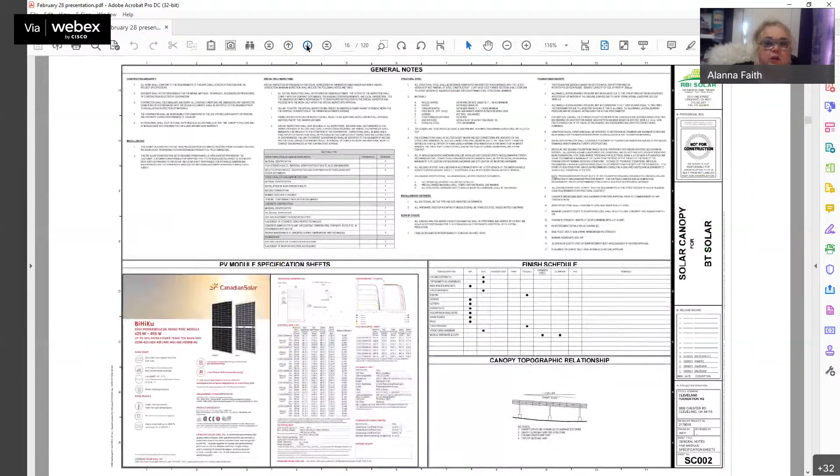And with that, to Ms. Brown for the oath. Good morning, I'm swearing in all who are present for this case. Do you swear or affirm that the testimony you're about to give is the whole truth and nothing but the truth? Please raise your hand.

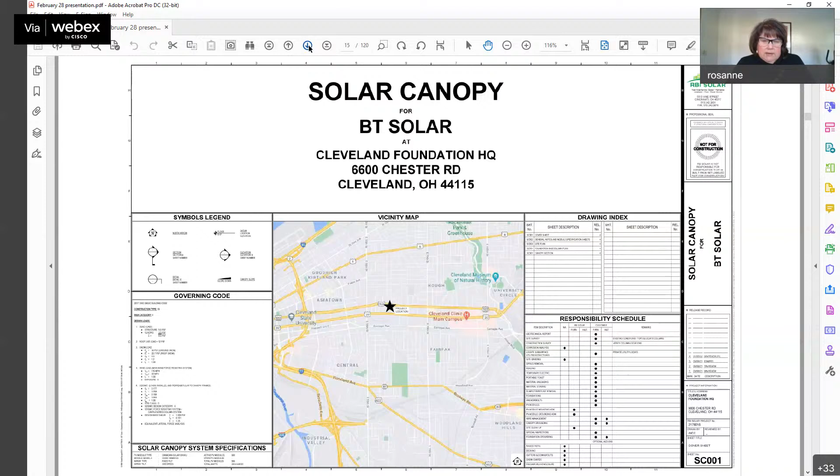The lot in question is designed to be an outdoor parking lot of 101 spaces that was previously presented to the committee and approved along with our headquarters design. The design shown here is a solar energy panel constructed as a canopy. It would sit in the middle of the parking lot.

It's very similar to the exact same type of solar canopy used at Rainbow UH Babies, just a couple of blocks down the street on Euclid in their parking facility. The energy produced from this will help achieve LEED Gold status for the Cleveland Foundation's building by using solar energy versus other types of energy.

So we're here today to try to understand what needs to be done in order to go forward with the construction of this canopy, which we thought was previously approved in the parking lot permit.

Okay, so you're handing it off to someone else now, right? Yeah, so I'll hand it over to Laura Reese, our Vocon architect at this moment.

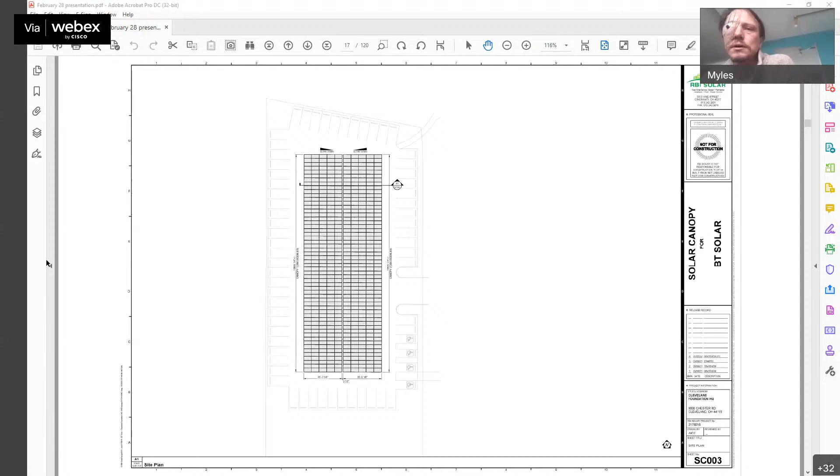Our perspective is that the use of this property has not changed. This was permitted as a parking lot and off-street parking accessory for the new construction happening across the street. This is auxiliary parking, employee parking, visitor parking for the facility.

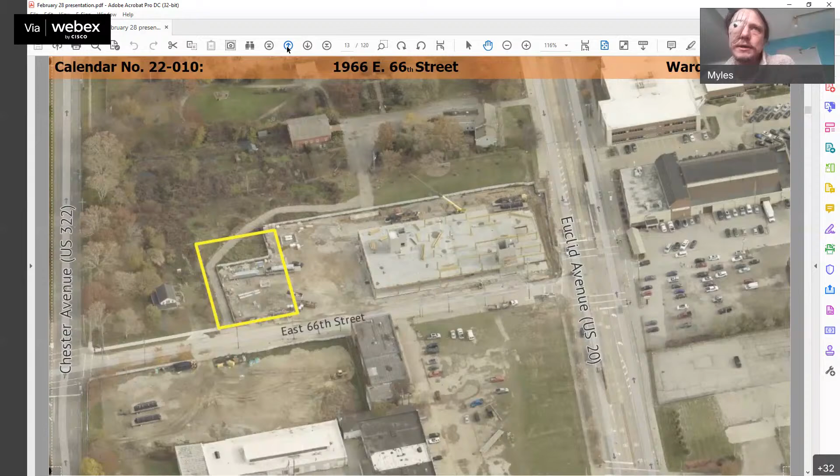The canopy that we're proposing is simply making use of land that otherwise would be sitting there as only parking, but trying to take that and turn it into electricity, renewable energy that can be used over at the Cleveland Foundation main headquarters.

This structure is similar to other projects that we've got around town, from the First Unitarian Church in Shaker Heights, to the aforementioned Rainbow Women's and Babies Center, to the historic renovation project over at the corner of West 25th and Detroit.

We received the notice of non-compliance and initiated this because we simply think that this use has already been permitted in the permit. The use has been established by previous permits as being an accessory off-street parking permit, and that this is simply an additional utility being provided on the site.

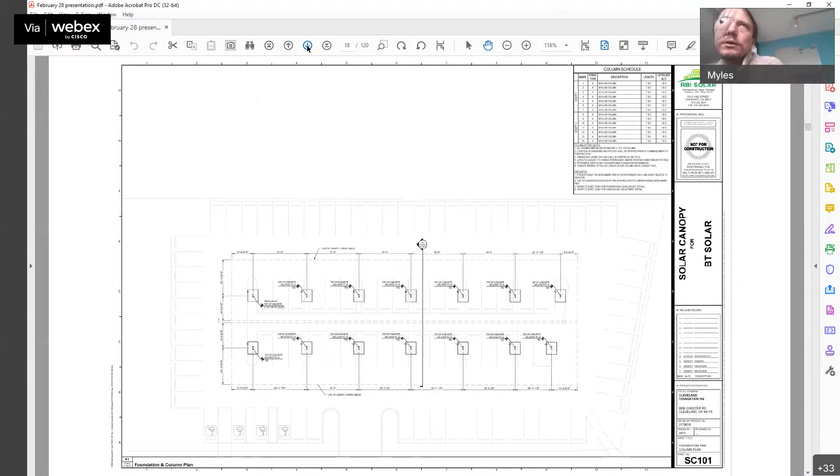Okay, we submitted those documents on, was it Monday, I believe? Are there any paper renderings right now, Maurice, that has it? I mean, if they don't have it, it's not necessary. This is what I have that was submitted with the application. Okay, I just don't have a video.

Okay, so on Monday we sent it to Elizabeth, because previously we had attempted to send it to Cassandra and it got kicked back. We didn't have the email listed in the notice for where to submit these to. So I can send that now, but it's my perspective that this use case was permitted, and this carport was even suggested and called out on previous plan sets.

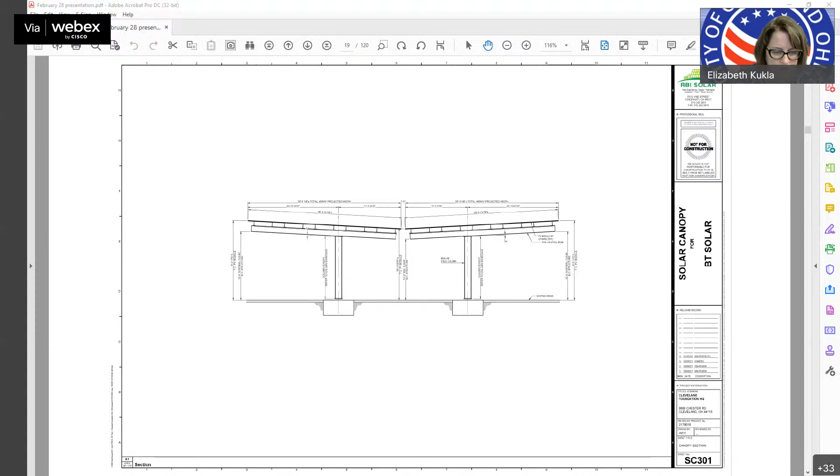I'll go ahead and check that email, Maurice. Could you tell me, through the chair, which person it would have been coming from? It would have been coming from me, Myles, and then the @ symbol BT, like Bravo Tango, dot solar, S-O-L-A-R. There is no dot com, just Myles with a Y at BT dot solar.

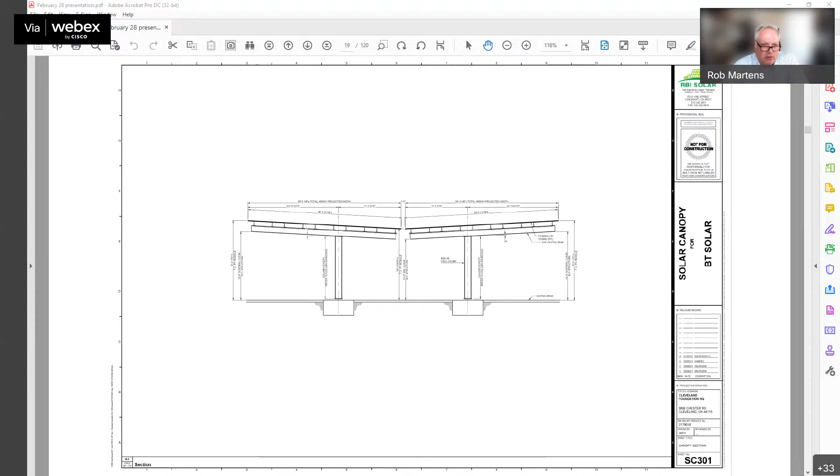No, I think Myles has covered it very effectively. The notice of violation was received in response to our filing a building permit for the solar canopy, and it was a surprise to us again, because we thought it was already a permissible use and zoning had been approved.

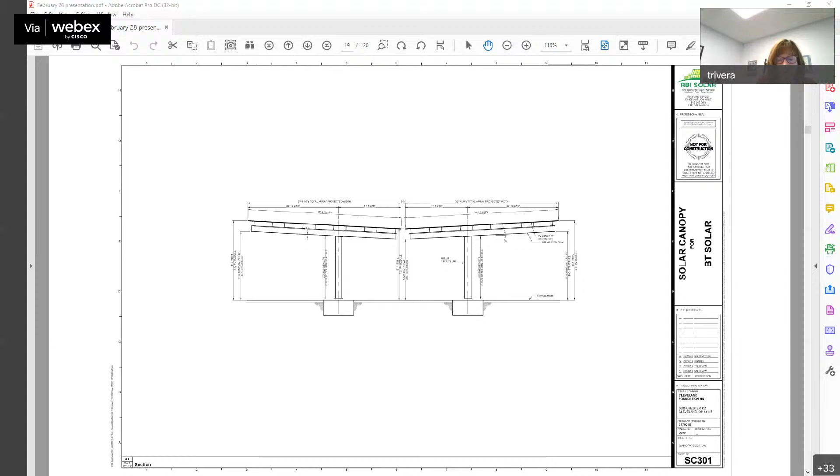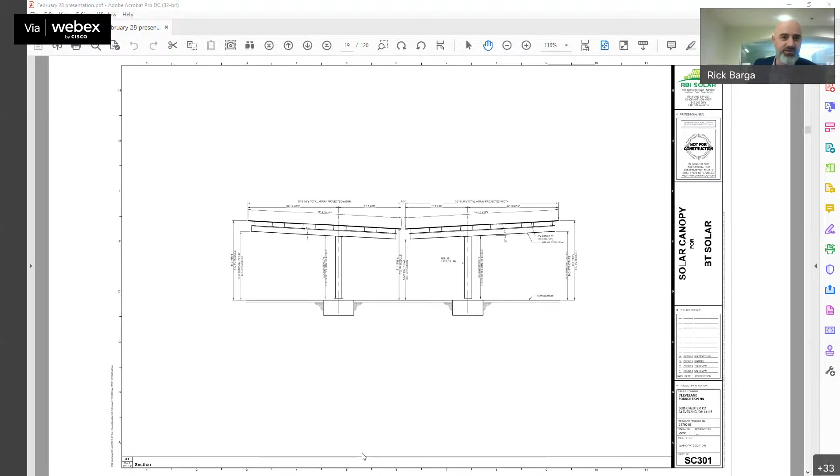Okay, thank you. Mr. Barga? Good morning. I also sent a letter of support from Midtown Cleveland. I'm the Vice President of Economic Development here at Midtown, expressing Midtown Cleveland's support for not only this variance, but also the Innovation District, the Cleveland Foundation's headquarter move, and everything we are trying to accomplish in the neighborhood. So if that hasn't been provided, I'm happy to send it again. It was sent on Friday.

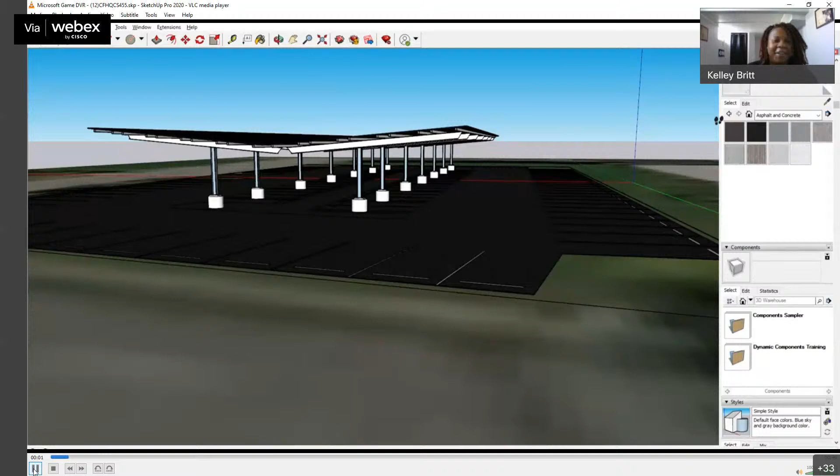All right, is this the rendering right here, Maurice? Yes, ma'am. And I might also point out we have Kim Scott here, the neighborhood planner. I have Kim on the list. I just wanted to get this over.

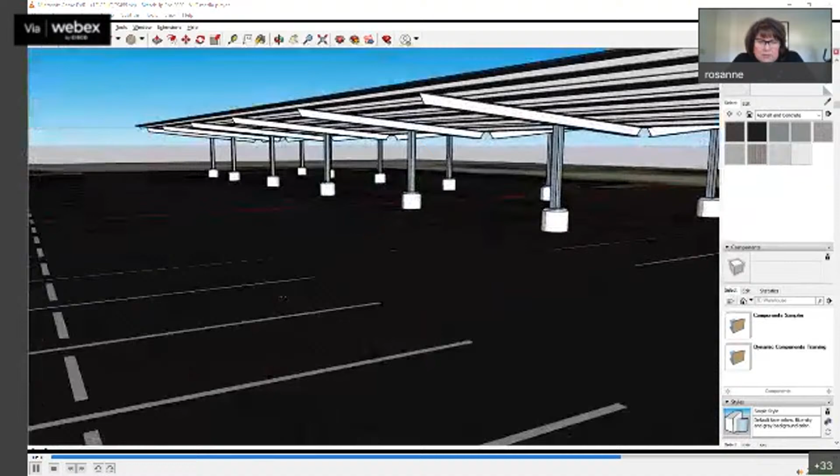There's parking spaces around the perimeter of it and underneath it. There'll be ample lighting, blue emergency lighting there as well. There'll be cameras. The parking lot, as previously requested, is not shown on this diagram, but it's surrounded by a decorative fence. That's only for the entire rendering, showing you the 3D dimensional aspect of what the canopy will look like.

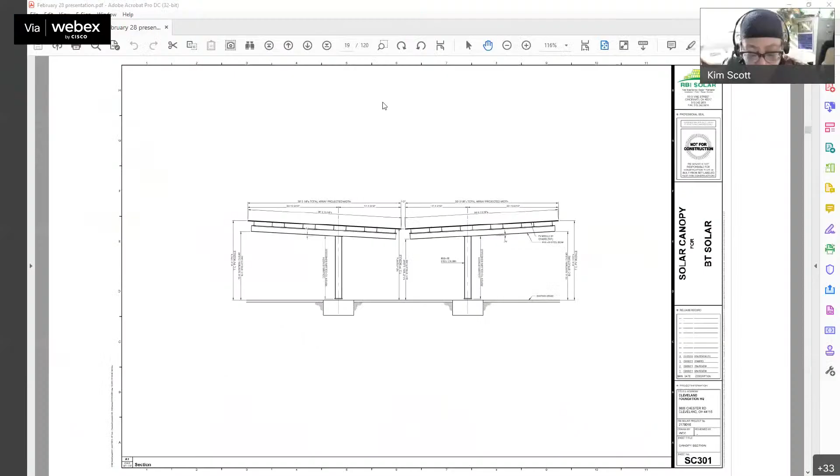I just want to remind the board the purpose of the Midtown Mixed Use Districts and why it was established. It was established over 15 years ago, and the regulations are established in order to permit and encourage an intensity and mix of development that supports and implements the development policies that have been established for this area by the City of Cleveland, Greater Cleveland Regional Transit Authority, and Midtown Cleveland, Inc. The intention in establishing this district in the development regulations is to permit specific uses at a development intensity and with an urban form in that manner.

To encourage a pedestrian-oriented mix of uses, including retail, residential, offices, and light industry, expands the available economic development options while strengthening the existing uses found in the Midtown District. It encourages a compact land development pattern that increases resident and employment densities to support RTA's Euclid Corridor Transportation Project investment and facilitates usage to and from the Midtown area.

To ensure that new development and or redevelopment will occur in a unified manner consistent with the Midtown Cleveland, Inc. strategic plan as adopted by the City of Cleveland Planning Commission. And finally, to establish design criteria for new development or redevelopment to ensure that an aesthetically pleasing and pedestrian-friendly environment is provided. That was established in 2005.

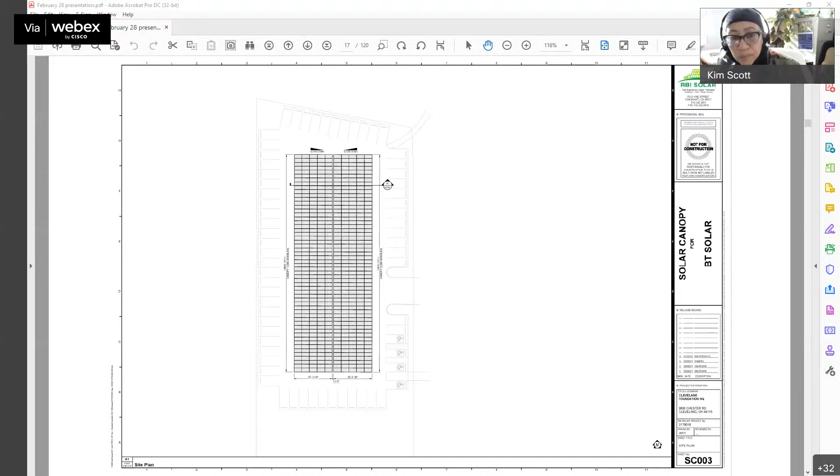Madam Chair, can I add something? The MMUD, the Midtown Mixed Use District, is a little bit of a unique district in our zoning code, in that if one use is not specifically listed, it's not permitted, and that's why we're here today. As Ms. Scott stated, we enthusiastically support this, which is why it was a surprise that it had already gone through Planning Commission and been approved. We were surprised to see it until we realized it was the MMUD district that kicked this out. So maybe it's time to look at that again for future reference.

Thank you, Maurice. I'll open it up to the board for questions or comments. Madam Chair, this is Ms. Faith. I just had a question. I believe Ms. Potter noted that this particular structure with the solar panels is part of the LEED certification. Is the LEED certification contingent on this? I just wanted to clarify that.

We most likely would not receive a gold status. We would probably drop down to silver if we did not have the solar capability to produce this type of electricity. Solar is a very powerful investment tool if you're trying to get LEED points and reach the highest levels. In order to get past basic LEED, you really need to start considering how you're going to implement renewable energy on site. The building footprint and the roof weren't enough for us to get the points we needed.

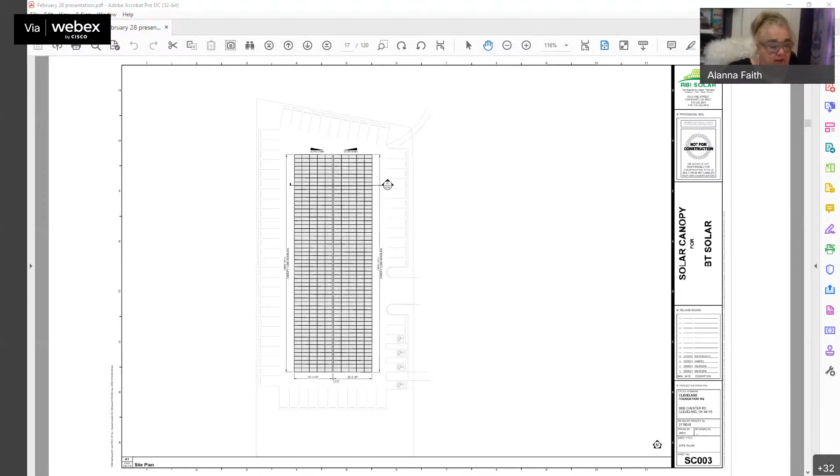With that, I will move that we go ahead, given testimony from two city planners from the Midtown CDC and the explanation we just had from the Cleveland Foundation and their agents. I move that we go ahead and approve this variance for calendar number 22-010.

Thank you. Can I have a second, please? Second, Ms. Barnes. Go ahead, call the roll. Ms. Kukla? Ms. Brown? Yes. Ms. Barnes? Yes. Ms. Faith? Yes. Ms. Britt? Yes. Calendar 22-010 is granted.

It'll be ratified next week, and we will send the appellant a letter. Thank you so much, we appreciate your support. All right, thank you, good luck. Bye-bye, looking forward to seeing this project come to completion. So are we. Yes, all right, thank you all. Thank you so much, everyone. Thank you, bye-bye.

Madam Chair, we move along to calendar number 22-013. This is at 1327 West 102nd Street. Rising Time Investment LLC, owner, proposes to establish use as a three-family residence in a B1 two-family residential district. The owner appeals for relief from the strict application of the Cleveland Codified Ordinances as stated in the agenda and the public record, of which there are four.

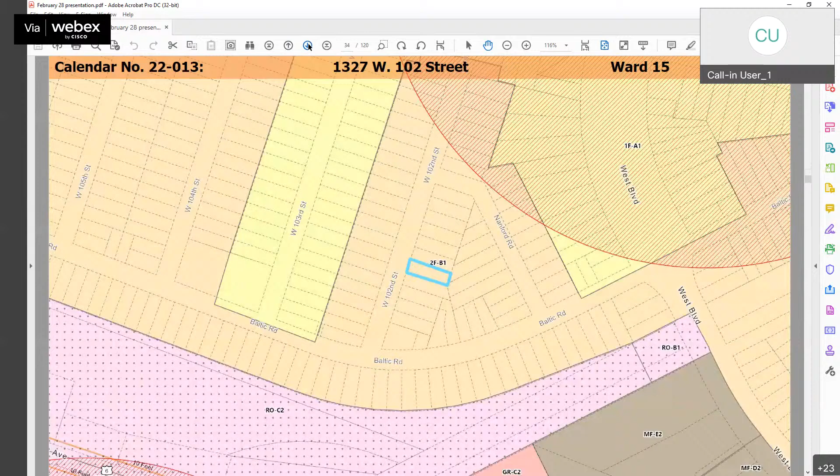All right, the property has been used as a three-family ever since God knows when. It has 3 gas meters, 3 electric meters. It has front and back entrances to the 3rd floor for fire exit and entering, separate exit and entering. The plans that we turned in show that it was designed as a 3-family. There are other properties on the same street who have been used, who are three families, have been approved as three family. One of them just a few houses down.

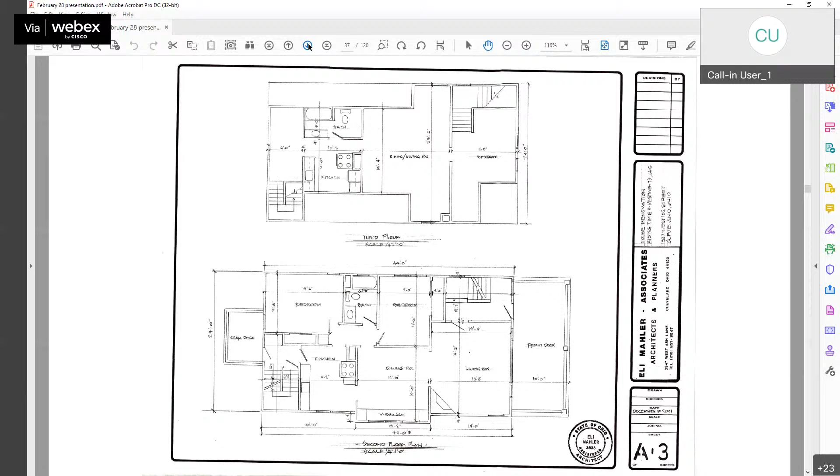The code, as I understand it, if it has been used for 2 or more years in a particular use without causing immediate harm or danger to any particular person or resident, is permitted to remain in that use. Since it has been used as a three family continually in the past, we're just trying to make it legal. Apparently, for who knows what, probably somebody trying to avoid paying taxes or something, it was not legal before. We're trying, Madam Chair, to make it legal.

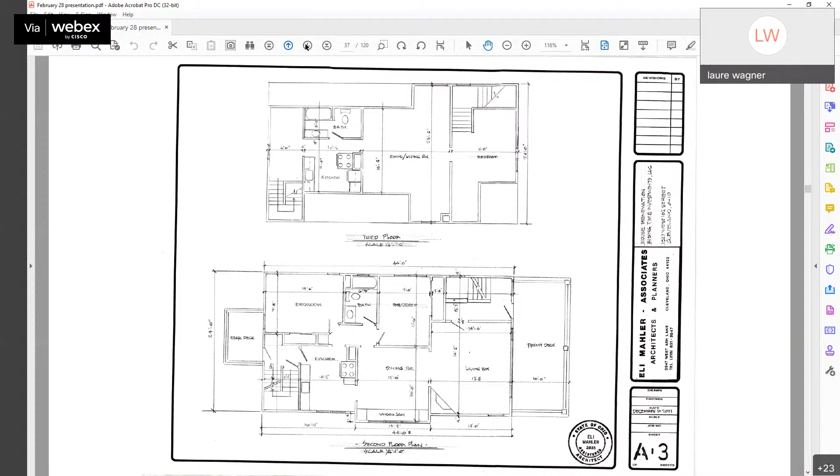I'm sorry for interrupting, could I make a statement? I don't know what code the gentleman's talking about. Yeah, me either. The zoning code, this has never been a legal three family, and there's nothing in it about using it for 2 years. I'm not saying the board should deny the request, I'm just saying the owner has no right to it as a matter of right. If in fact they met certain criteria such as off-street parking and a bigger lot size, the board could grant an area variance for this use. But since they don't, it needs to be a use variance and area variances for no off-street parking and smaller lot size. Just to clarify that. Like I said, I'm not saying the board shouldn't grant it, and certainly what it's been used for, the uses in the neighborhood are relevant. But there is no such code that gives you free reign after 2 years.

Yes, this is Yamili. The property was purchased last year, and it was a 3 -- meaning there was the upstairs unit, the 3rd floor was used and livable with heat, windows, and all the requirements to be used as a livable unit.

Okay, so you just purchased it last year, and you purchased it as is for a 3 family. Then what, you went to get your rental application or something and realized that it was illegal? No, we were not planning on renting it, we're fixing up the property right now. Correct, and Phil is the contractor, that's why he submitted the paperwork. Okay, I was just trying to figure out how it got triggered. Okay, thank you.

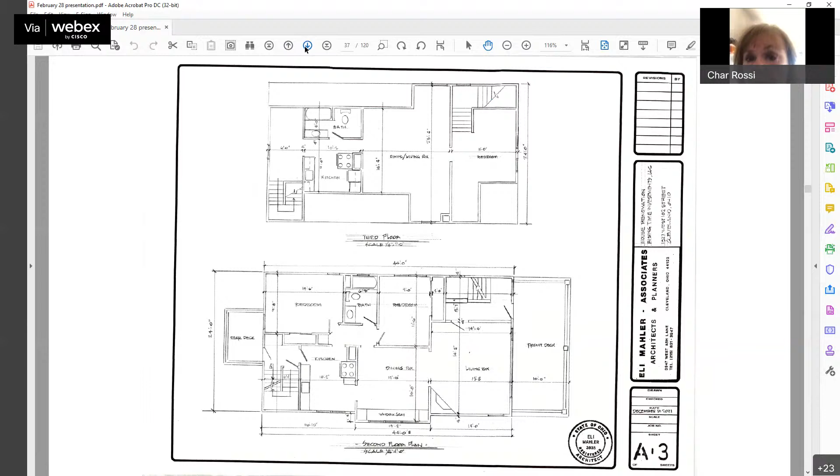Yes, hi. I've been an owner. My husband and I have a vested interest in this neighborhood now for 46 and 32 years respectively. We own 2 homes across the street from this particular home. I know the history of that home.

It has been used as an illegal third for many, many years. I'm standing in opposition to this appeal simply for the fact that you're already taking a congested residential area, and if this gets okayed, you're opening up a can of worms, because every 2-family in that area will apply for a 3rd floor variance. You'll be adding approximately 50 cars on my particular street, on 102nd, for parking. It'll be chaotic. A lot of the homes operate with illegal 3 families. That was the game all along, in the 70s especially—there were a lot of conversions. It didn't make it legal, but I'm looking at this from the standpoint of all the congestion and a chaotic situation from West Boulevard to West 117th. You'll have everybody and their brother putting in 3-family homes, and you're going to take a nice quiet area and make it crazy. So that's where I stand.

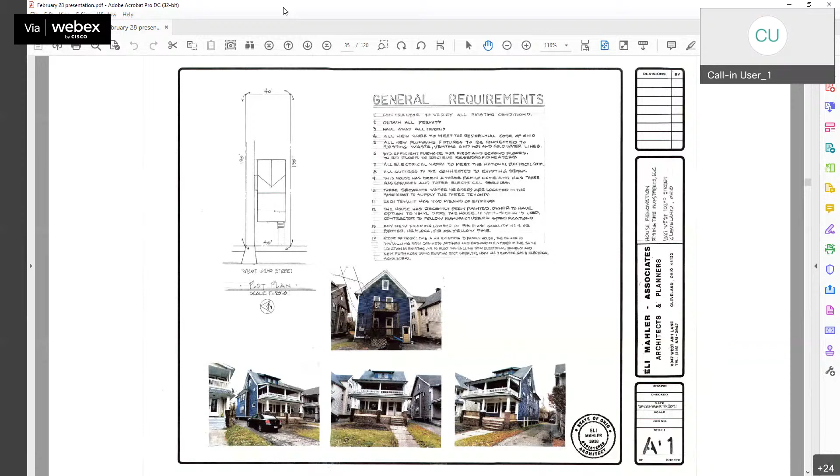And Mr. Serena, you wanted to say something else? I just wanted to make an observation in relation to what the lady had just said. I live in North Randall, and they recently built this huge Amazon facility where the mall used to be. I commented to my wife just a couple of days ago that they've added thousands of cars and trucks by the boatload, and I haven't noticed any difference in the traffic pattern, which was amazing to me. I expected to see traffic jams going out to work in the morning, but I haven't noticed any difference whatsoever. So I just think her argument there is not necessarily the case.

Okay, thank you. I'll open it up to the board, but before that, city planning, what's your position here? Madam Chair, Adam Davenport, our neighborhood planner, was on the call but had to jump off. He said he used to live on this street, actually, and noted that there are a lot of triples already on this street, though he didn't state whether they were actually legal triples or not.

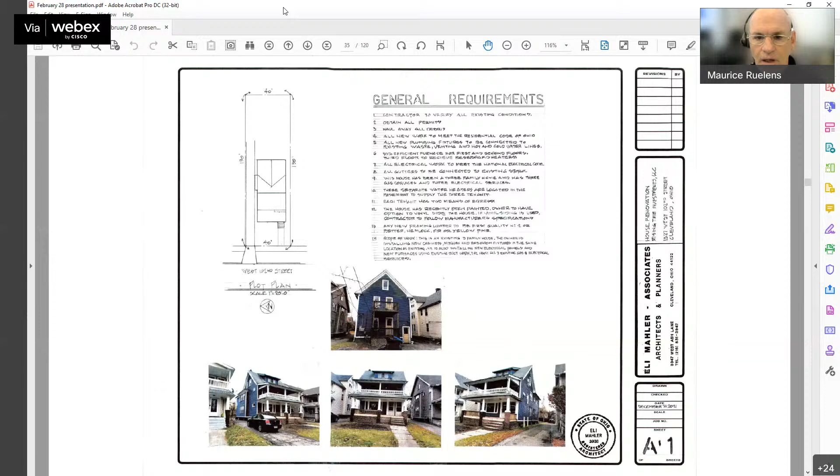I guess my biggest issue would be the lack of detailed parking on the site plan. It looks from an aerial image that there might be a parking pad in the back, as you can see here, but that's not detailed on the plan, so we'd like to ask the applicant if there is actually parking, and if so, we would need a revised drawing indicating the parking.

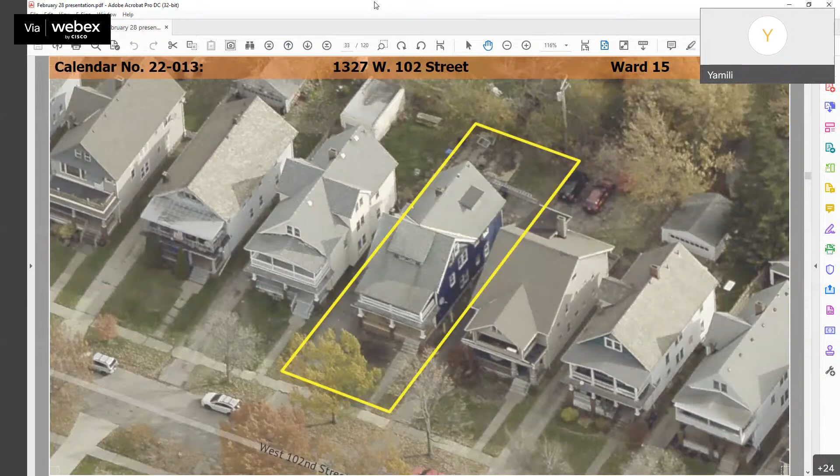Yes, Phil, if you can speak to that. Sorry, what's there? Yeah, go ahead. What's there is a pad for a removed 3-car garage. Okay, Madam Chair, we would request that a revised site plan be submitted, a scaled drawing detailing those 3 parking spaces.

Okay, so with that, are you all in support? Yeah, we have no objections if they provide the parking. Okay, thank you. All right, now I'll open up to my board for any questions or comments.

I do, Madam Chair. Member Brown: two questions to the applicant. When you asked the question about use, the applicant responded that they are fixing the home up. I'd like to know if it's for sale or to rent. And then, to city planning—you're asking for a drawing to show the parking spaces. I'd like to make sure we're requiring, under item 4, that it be paved and drained and graded, that all of that be fixed up. It's not clear from the aerial that it is.

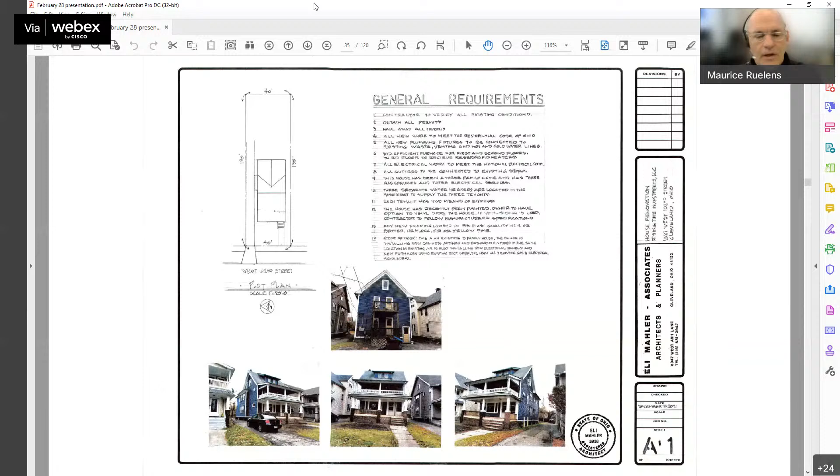Madam Chair, I'm not sure if Ms. Rossi has her hand up again. No, it's been up the whole time. All of them. Oh, okay. Yes, I do. Oh, Ms. Rossi, you want to speak again?

I just real quick here. I want to let you know, I did contact Jenny's, the council person's office, and I guess she had a prior commitment today to join us. So I just wanted to let you know. Okay, thank you.

Okay. So do we have any other discussion, Madam Chair? I don't think so. I think we can move to a motion. Okay, great.

So with testimony from the owner's contractor and from the owner, that this dwelling has had 3 gas units, 3 electrical meters, has been previously occupied as a triple, though unknown if it's legal or not, and in a neighborhood where other triples exist, as testified by proxy to Mr. Davenport. I think we can go ahead with conditional approval of this motion based on Mr. Ruelens' request. It would be necessary that we have revised drawings submitted for the parking. Those drawings need to show that the parking area has been graded, that it is drained, and that it is properly paved. The drawings need to be to scale and submitted prior to our ratification, should the vote go in favor of approving this variance.

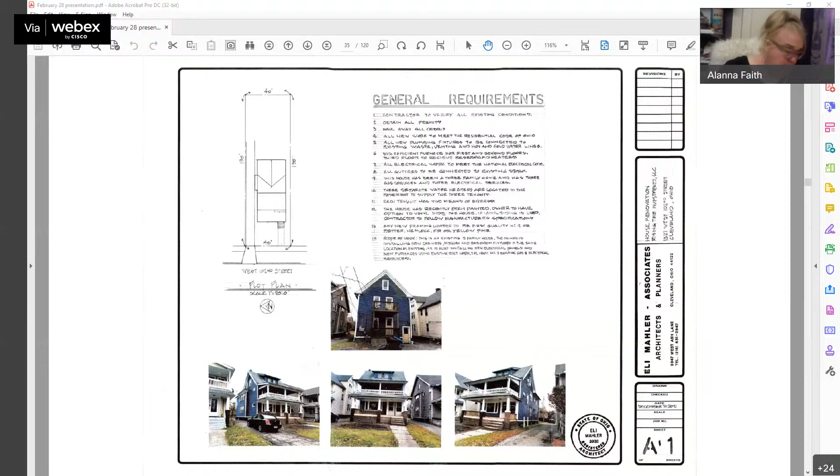You can have a second, please. Second, Ms. Barnes. Ms. Barnes with the second. Go ahead, call the roll, please. Ms. Brown, yes. Ms. Barnes, yes.

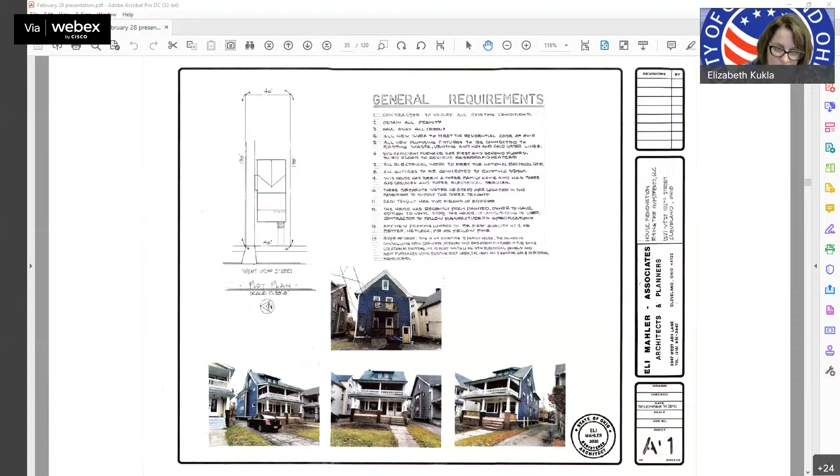Ms. Brett, yes. Calendar 22-013 is granted conditionally. We will hold ratification until we receive that updated plan showing that the 3 parking spaces at the rear will be paved, graded, and drained, and the new site plan will be drawn to scale. Once we receive that, the case will be ratified the following Monday, and we will send the appellant a letter.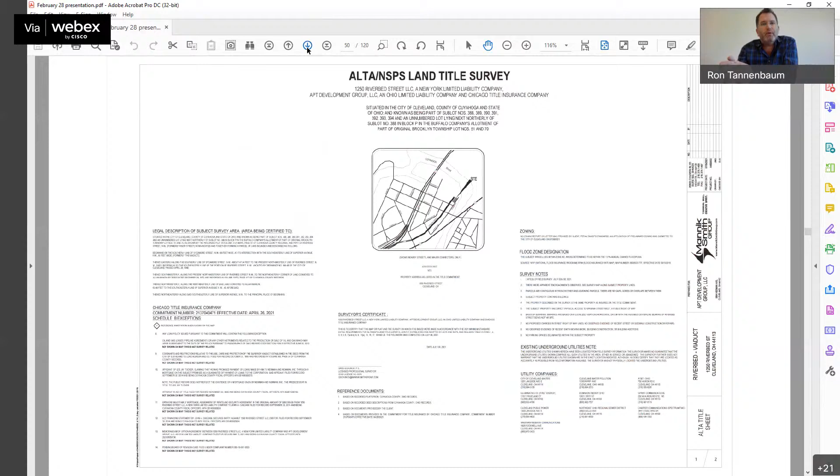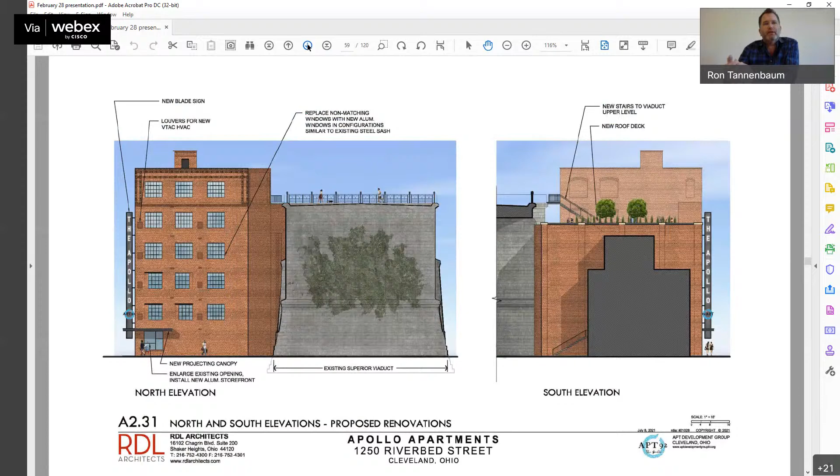There are some slides that show the uses here, and then the elevations that we are choosing to maintain. There will be a rooftop amenity deck, and the owner has also retained a lease on the underside of the viaduct to create a community space for residents as an outdoor lounge, which we feel is the best use of this space directly adjacent and under the viaduct, allowing people to pass through and walk from the leased space in. You can see that on this rendering. In terms of the view under the viaduct, that's rendered out as an amenity space as well. So residents would walk through that and access their parking directly adjacent.

Madam Chair, may I ask a question related to the leased parking space? Can you show us on the site plan the location? You just mentioned walking under the viaduct, so that piqued my question.

Madam Chair, I added it to this drawing here. It's the blue square, I believe, which is the leased parking area. And then the blue outline is the actual building at 1250 Riverbed.

Sorry, I didn't mean to interrupt, Mr. Tannenbaum. No, that's fine. The empty space between the light blue building and that next green line is the viaduct. That's the amenity space that we would have the residents walk through, and then they could also walk on the public streets to gain entry from the other side of the building.

As you're probably aware, there's a significant amount of parking on the other side of the viaduct to support the Nautica and Powerhouse, and the uses on that parking have been few and far between where they're a heavy use, and Jacobs Group has generously given us a long-term lease on those spaces to allow for these residents to occur.

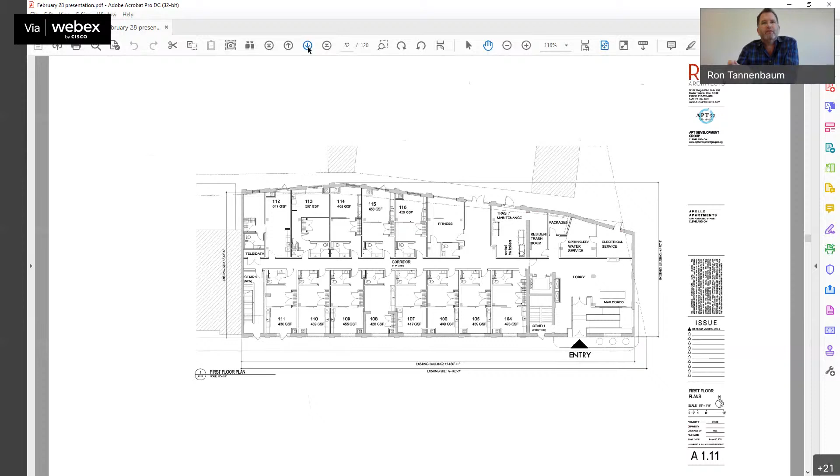Madam Chair, this is Liz. If we could ask the appellant to send us a copy of that parking lease agreement. I do not see one in our file. It was emailed to you, and I believe it was just shown on the screen as well, after the renderings. Okay, great. Yes, I have the email.

Yeah, I thought I saw it on the screen. Okay, it's right there. Yeah. Thank you.

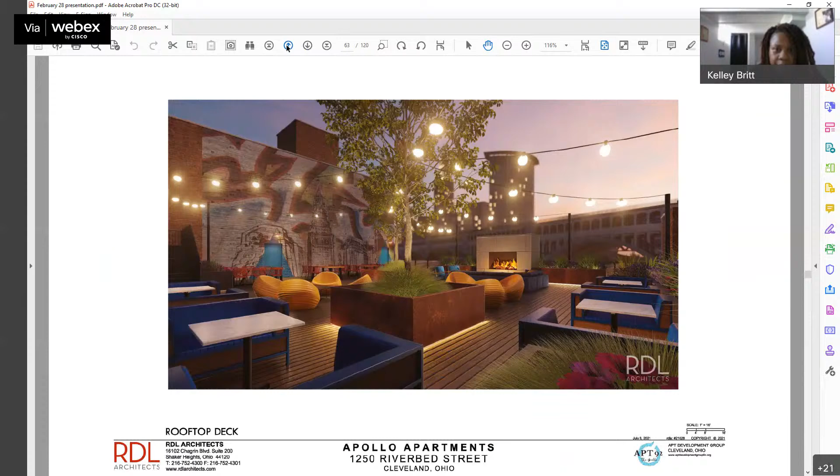Okay, Mr. Tannenbaum, anyone else from your team want to speak? Mr. Kelley? Thank you. I just want to let you know that I've spoken with Councilman McCormack, who is in full support of this project.

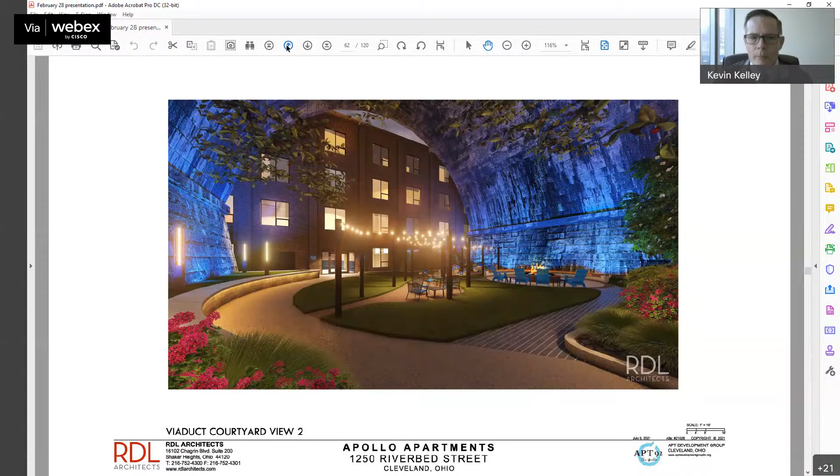It's a great opportunity to take an otherwise vacant property and make something great out of it. The lease that has been signed satisfies a requirement that's being requested, and as Ron previously stated, we have schematic approval from Planning Commission and plan to go back for full approval after we get through today.

Thank you. Mr. App? No, ma'am, thank you. There's nothing else to add?

Okay, as a former resident of the West Bank of the Flats, I'm glad to see something's happening with this building, so that's good to see. I'll open it up to the board for any questions or comments.

Madam Chair, this is Liz. Sorry to interrupt. I do have a letter of opposition from a resident at 1237 Washington Avenue, Unit 412. He's writing to object to 1250 Riverbed Street for the appeals of the relief of the specific sections mentioned. As a longtime resident of this area, he stated with 100% certainty that there is not enough street parking as it is for residents of the building.

Approximately 25% of his building has to park on Elm Street, Washington Avenue, and Center Street because the condominium units do not have the garage parking spaces needed. These available street parking spaces become very difficult to obtain on days when there are events happening nearby, such as concerts at Jacobs Pavilion. In addition, parking in the area has become considerably worse with the addition of the tank building in the flats, acting as an event center and a wedding venue.

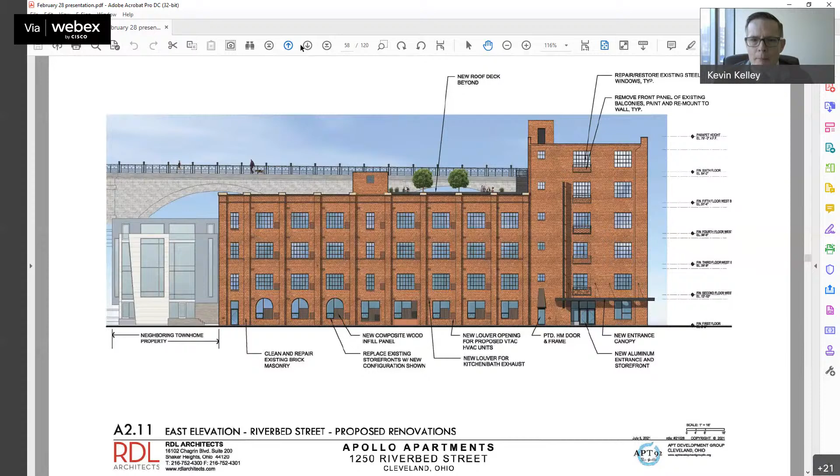In response to the letter, the spaces that are being leased, that are being provided by Jacobs, are more than ample to deal with whatever congestion may be caused by this. But in addition, there's also, I believe, 15 or 18 street parking spaces that are not used right now or not plowed right in front of the building on the river side of it.

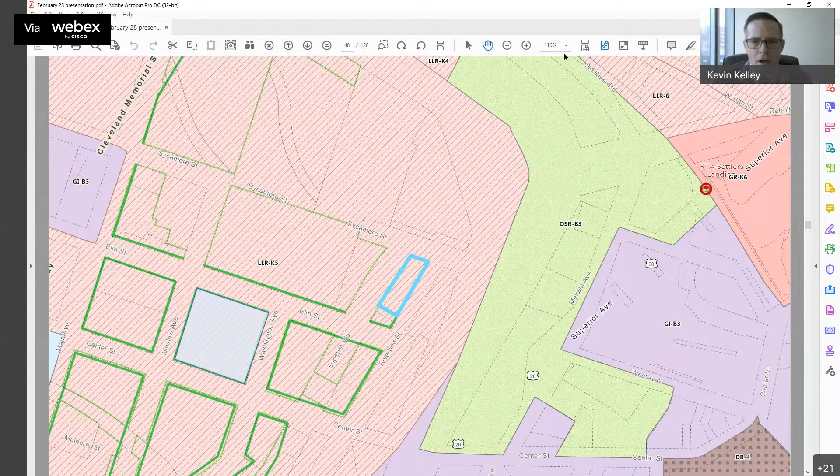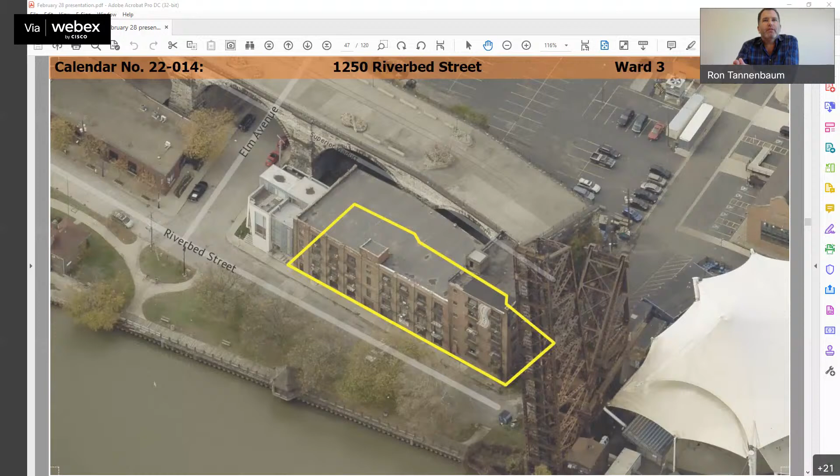Yes, I would like to second what Kevin Kelly has just said, and add that it was a very similar concern in terms of our discussion to create a long-term lease on private property that isn't going to overburden the streets even further. That's why, even though the code only requires 18 spaces, our owner has chosen to actually lease 30 spaces. So we are going above and beyond the codified requirements of this urban overlay district, obtaining 30 leased spots with the direct intent of not further exacerbating the issue of street parking.

In addition, we were in discussions with former Chief Rybka about creating additional parking along the street there on Riverbed, which could further provide parking to the community and the building itself. That hasn't been resolved yet, so I don't want to add that into the mix, except to say it's part of the rebuttal to that argument - we're currently working with the city to look at traffic patterns and potentially provide additional street parking between our building and the community park directly across the street. But again, just to reiterate, 30 spaces on private property should alleviate the concern of that resident.

All right, thank you. Maurice, I didn't see - is anyone from city planning here, or is that you? No, just me. Yes, city planning is very happy to see this building renovated and brought back to life.

It's a substantial building in the Flats. It's been there for a very long time. I've been working with the Flats ever since I started my career at city planning, and that building has been in use almost the whole time in various stages - a lot of residential in there.

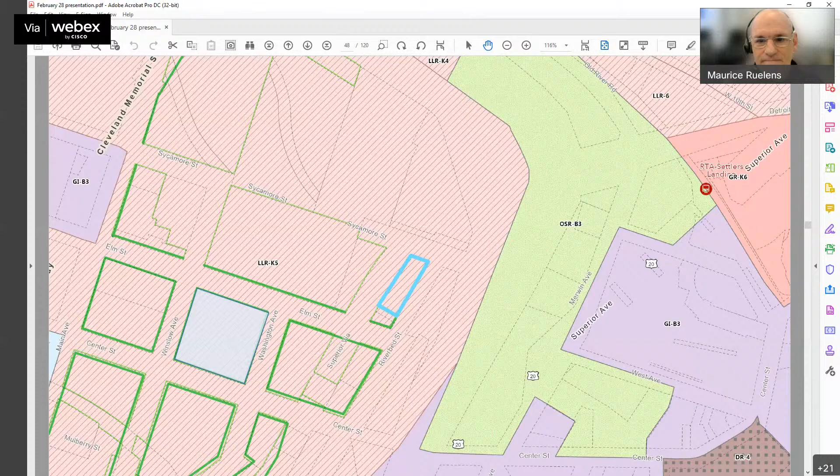All right, I will open it up to the board for any questions, comments, or mention.

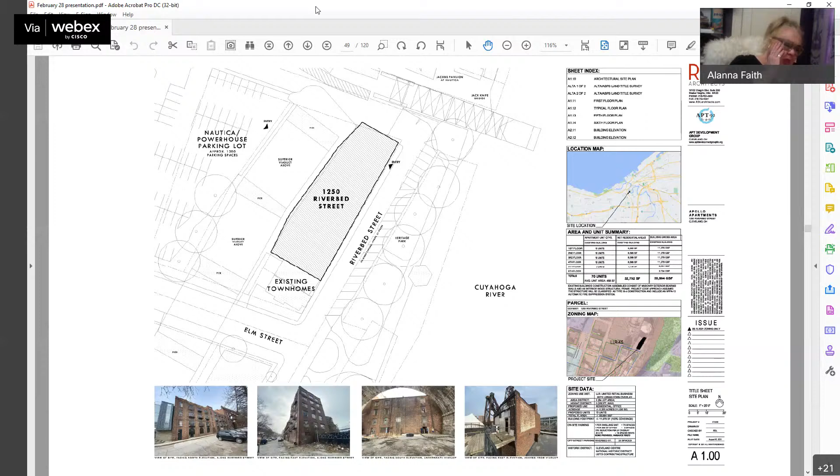Madam Chair, we kind of have been talking a lot about the parking, but I just wanted to reiterate - we have a contract already in place for 18 spaces. And I believe the start date for the second contract for parking, if I remember correctly from Mr. Tannenbaum's statement, starts in January of '23. Is that correct? Do we have a copy of that contract? That's in the same contract language that you have on the screen. Okay, we got that covered then.

All right, is there any further discussion then?

All right, Madam Chair, I'll take it to a motion. Calendar number 22-014. Given testimony from Mr. Kelly, from Mr. Tannenbaum, the support of city planning on this, and Maurice has given away his age there with his tenure at the city - we know they have already had some review from the design review board. So number 2, city planning approval will be pending. Do we feel like we need to make that conditional on approval, or can we just go ahead and move to approve this? So just go ahead. Okay, great. So with that in mind, I move that we go ahead and approve variances for calendar number 22-014. Thank you.

Can I have a second? Thank you, Ms. Barnes, second. Go ahead, call the roll please. Ms. Brown? Yes. Ms. Barnes? Yes. Ms. Faith? Yes. Ms. Britt? Yes. Calendar 22-014 is granted.

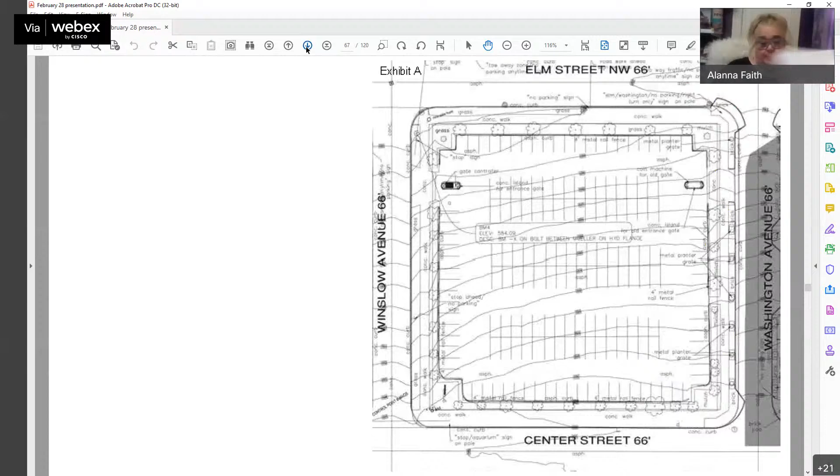It'll be ratified next week, and we will send the appellant a letter.

Thank you all very much, great to see you. Thank you. Thank you. Take care, Mr. Kelly. See you too. Thank you. Good to see you. Great to see you.

All right, moving on then, calendar number 22-022. This is at 4636 Oakley Avenue. Mitsa Paria, sorry if I've mispronounced that, owner proposes to erect a second-story addition and an attached garage to a single-family residence in a B1 two-family residential district. The owner appeals for relief from the strict application of the Cleveland Codified Ordinances as stated in the agenda and the public record, of which there are 6. To Ms. Brown for the oath.

I am swearing in all who are present for this case. Do you swear or affirm that the testimony you're about to give is the whole truth and nothing but the truth? Please raise your hand. Reply, I do. Then state your name and address, please.

I guess I'll go first. My name is Greg Noeth. I'm the architect. I live at 1790 Saratoga Avenue, Cleveland 44109. My name is Mitzi Perea. I'm the owner at 4636 Oakley Avenue, Cleveland, Ohio 44102.

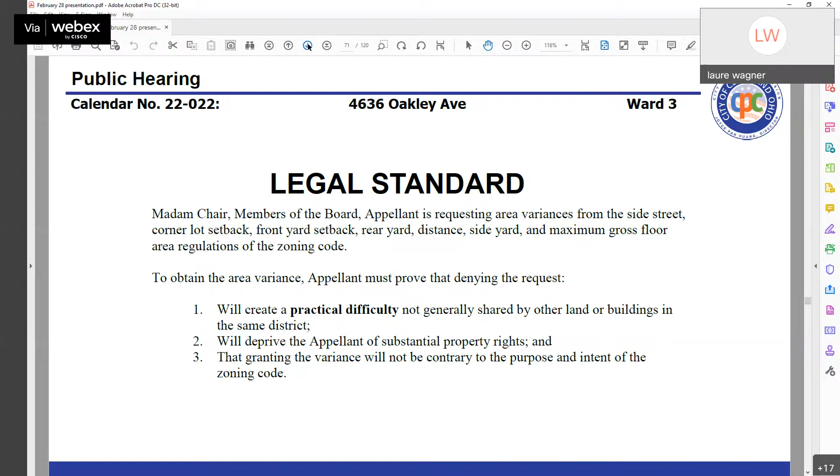All right. Who will be the spokesperson for this case? I guess I will. I'm Greg Noeth, the architect. All right, Mr. Noeth, go ahead.

Well, one of the problems we have is we're going to add a second floor to the existing first floor house and make livable bedroom units. And that involves why we're approaching right along the street setback, since the existing home right now borders right up to the street on the first floor. So that's one of our problems.

The old layout of the house actually had a garage that went in the back area. It came in off of West 44th Street, across the backyard into a garage. And somebody along the way put in what is now the existing driveway to the east side of the house. We're going to keep that driveway, but redirect the garage to face that new driveway to create a backyard along West 44th Street from the back of the house.

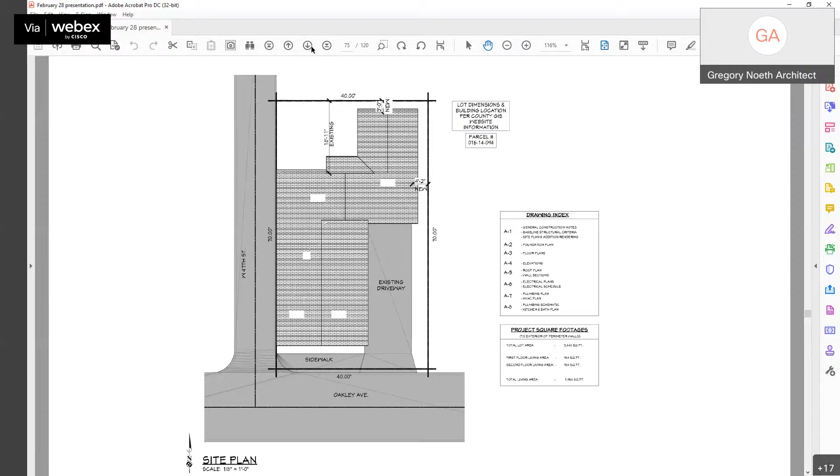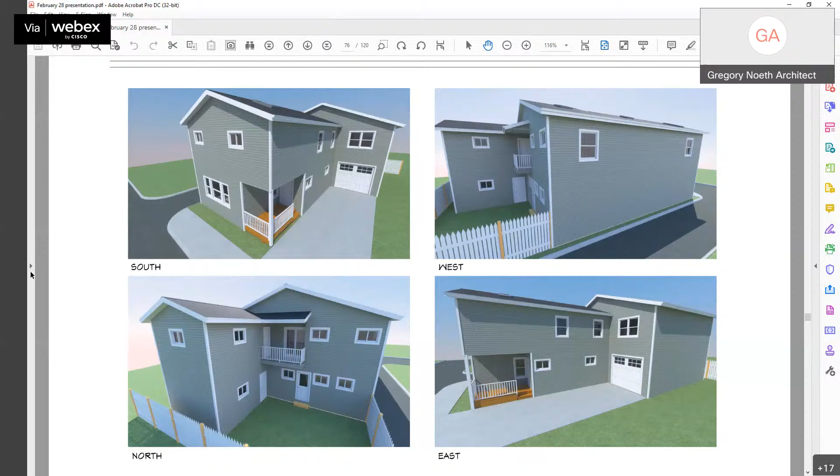The owner requested to put a living unit above the garage for additional space, and that led to why we're at such a large amount of floor area. That's basically what we're doing. There's another home similar to this on Oakley, across the street from us on the south side, that did similar, adding a second story and a 2-story garage. And that's what we're matching.

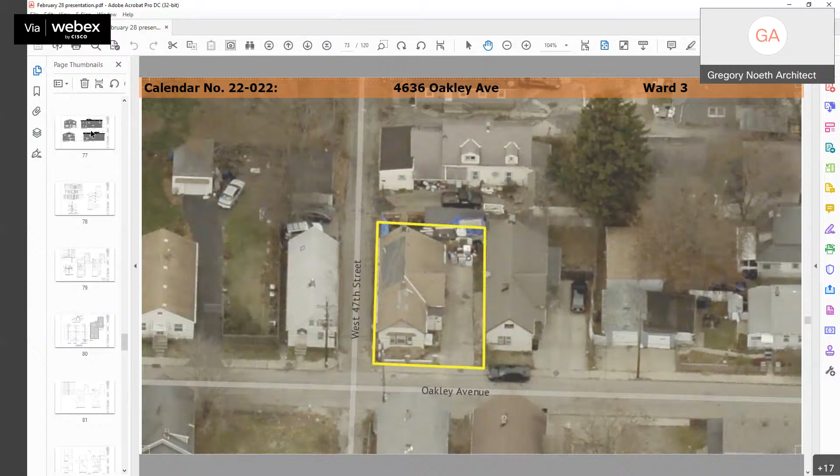Okay, and the homeowner, do you want to add anything? No, just trying to see if I can get this approved so we can move forward and try to fix the home and just give it a better improvement on that street. There's only about 4 houses on that street. Will this be your house? Yes, ma'am. Okay.

All right, city planning? Yes, Madam Chair, I wanted to ask Ms. Wagner if she would chime in. Because this is an existing condition, talking about the front yard setback, as you know, that can be problematic for the board to grant. Yes. This is actually an existing condition, so I believe the board has the authority to grant this?

Yes, that is correct. I think myself and Maurice and the rest of the staff looked at this, and it would fall in the category of an expansion of a non-conforming use, which can be provided if a variance is granted. Obviously, if they had tried to extend the second floor so that it was less code conforming in the front yard, that would not be allowed. But in this case, it's the same distance that it exists right now.

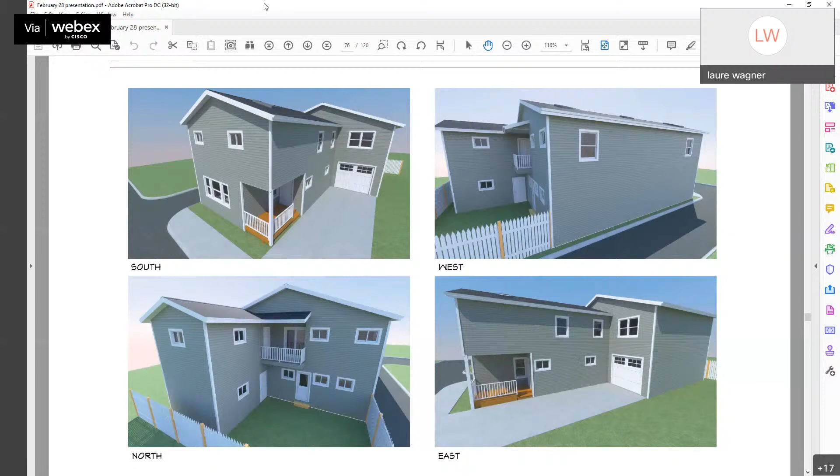Very good. That's kind of what I interpreted, why I didn't make it a big deal that I normally do. Just wanted to clarify because I know they can be a big deal.

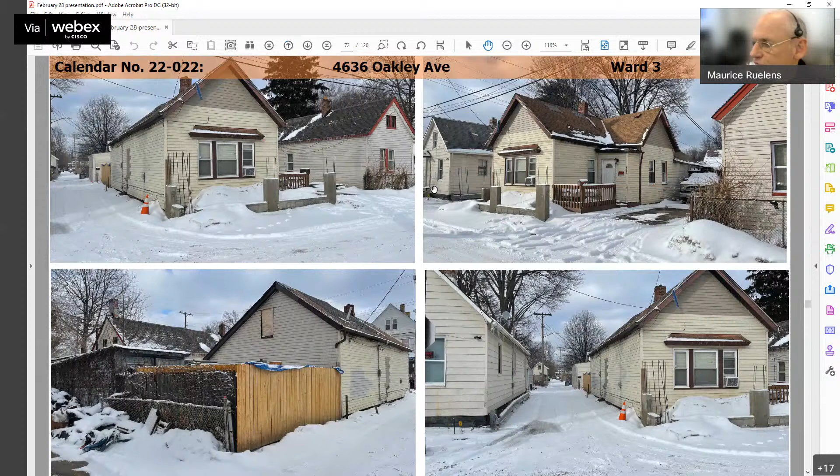Appreciate it. And also, of course, the 0-foot setback on the side yard, which is over there on West 47th, is an existing condition, as you can see. And if you look even on my pictures, you can see that the house next door also has the exact same condition. So it's a common condition in that neighborhood. It was built years ago in just a very dense neighborhood. And for those reasons, we have no objection to this application.

Thank you, Maurice. All right, I'll open up to the board. Unless any of my colleagues have questions, I'll move forward. Okay. We do have, Madam Chair, I don't know if anybody noticed Gabriel Rivera has his hand raised.

Who is it? I don't know, did you want to comment on this case? I think he was on the last couple of cases. Yeah, I think he was in the last one. That's probably what it was. Yeah, I can't hear him. Okay, just don't want to miss anybody.

Thank you for being so alert, Maurice. All right, so with that, since we have no other comments...

Madam Chair, given the testimony from Mr. Noeth the architect, the homeowner, our statement from Ms. Wagner on the legal technicalities, and also the support of city planning on this, we know that this is a very dense neighborhood with very minimal setbacks all the way around. So I move that we go ahead and approve these variances for this project, which looks like a very nice home. Thank you, we'd like to have this move forward.

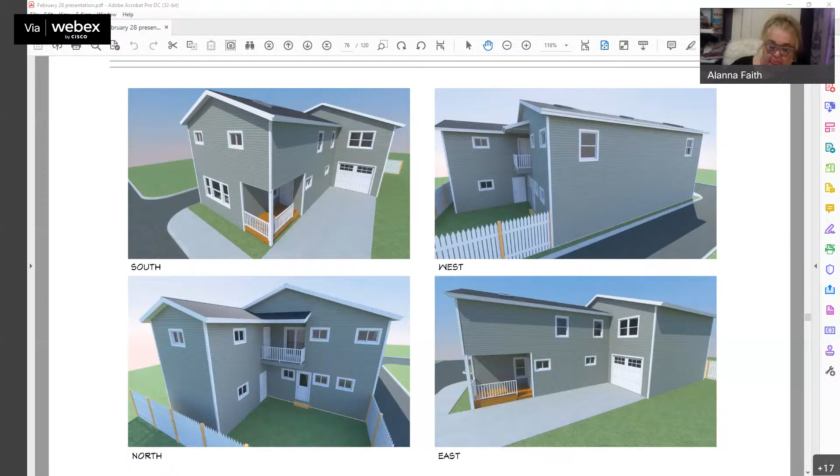Thank you. Can I have a second, please? Member Brown, I second. Brown seconds. Go ahead, call the roll, Ms. Kukla. Ms. Barnes, yes. Ms. Brown, yes. Ms. Faith, yes. Ms. Britt, yes.

Calendar 22-022 is granted. It will be ratified next week and we will send you a letter.

Thank you, thank you guys. All right, good luck with your house. Good luck to you. Thank you so much. Looks very nice. Thank you, God bless you guys. Bye. Madam Chair and Ms. Kukla, somehow I seem to be missing the first slide. Oh my God, that is the best news ever.

Hi, how are you? East 65th Street. Put my mask on as well. Mitzi, you gotta mute your phone, honey. Oh, we can still hear you. I apologize, you're still live. Okay, there we go, there you go. All right, she was all excited.

Ms. Faith, do you have the agenda in front of you? Can you read it from the agenda? I can read it from the agenda. Absolutely, thank you. I don't know how that happened. Not a problem, Maurice.

Okay, so calendar number 21-181 was postponed from January 24th, 2022. This is at 3733 East 65th Street. Ran Romano, owner, proposes to establish use as 7 residential units and 3 commercial units in a B1 local retail business district. The owner appeals for relief from the strict application of the Cleveland Codified Ordinances as stated in the agenda and the public record. Of note is number 5, section 352.04, which states that a landscape plan is required. The second postponement of this case was made at the request of the city planner to allow time for design review to take place. The first postponement of this case was made at the request of the councilperson to allow time for community review. We trust that all those things have happened and we're here today to hear this case.

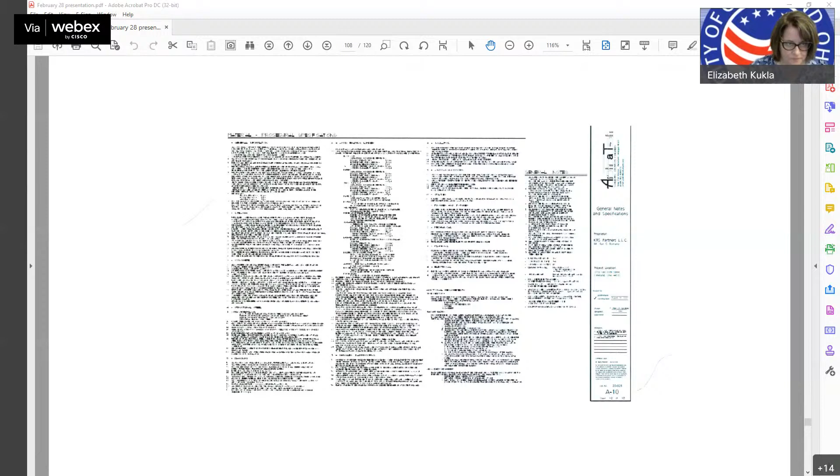Madam Chair, may I ask, is the building vacant or occupied now? Oh, the building is currently vacant. One more question, Madam Chair. And how long has Mr. Romano owned the building? He's owned the building for about 2 years.

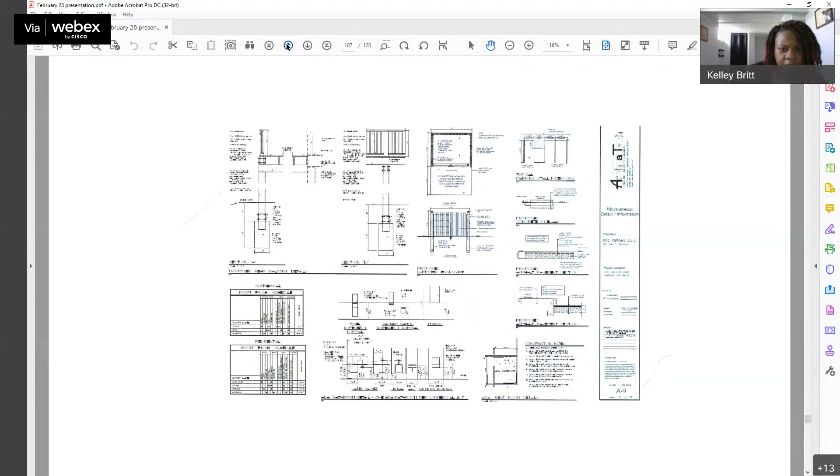Number one is section 349.04, which states that 13 parking spaces are required and 9 are being proposed. Number two states that accessory off-street parking driveways and maneuvering areas shall be properly graded for drainage so that all water is drained within the lot providing such parking spaces. And the driveway used to provide accessibility to accessory off-street parking spaces shall be located and arranged to minimize traffic congestion. The proposed driveway use is not on subject parcel, nor in the same ownership.

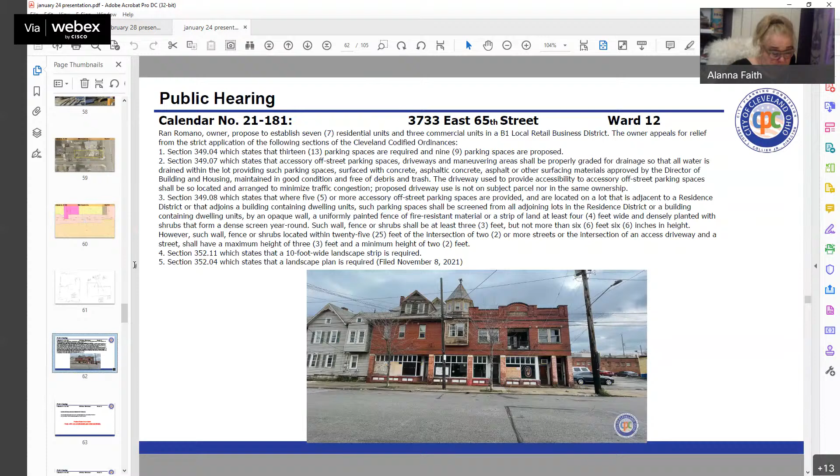Number three states that where 5 or more accessory off-street parking spaces are provided and are located on a lot adjacent to a residential district, or that adjoins a building with dwelling units, such parking spaces shall be screened from all adjoining lots in the residential district by an opaque wall, a uniformly painted fence of fire-resistant material, or a strip of land at least 4 feet wide with densely planted shrubs that form a dense screen year-round. Number 4 states that a 10-foot wide landscape strip is required, and number 5 states that a landscape plan is required. So basically, we're looking at variances for parking and the requisite landscape strips, Madam Chair.

Yes, thank you, I needed some context here. All right, great, yep.

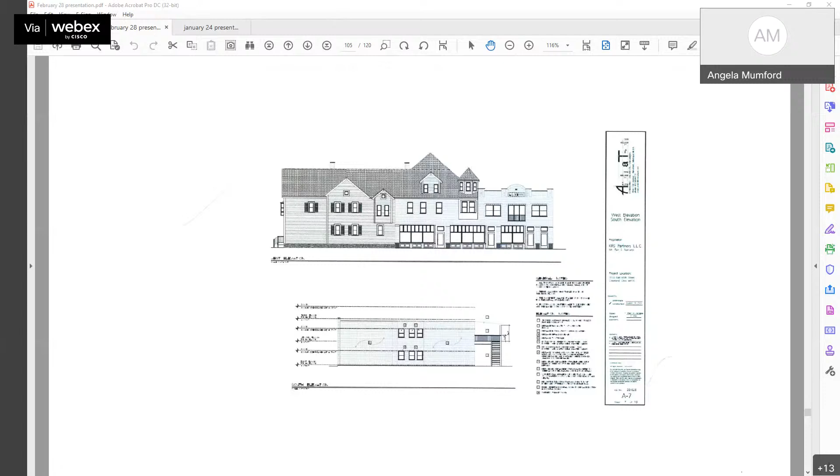Okay, so if you see the additional parking, for the plans we are going to have some more updated plans with the additional parking. You'll see there are going to be 9 more shared spots with the building right next to it. Our architect recently passed away, so we have to get another architect to redo the plans for you guys. And then the green lines are the connector walks.

Oh, I'm sorry, Ms. Mumford, go ahead. So the parking that's directly adjacent to the existing building is the one that you have, and then the one across from, like the green line there, are the additional spaces you're talking about? Yes, so to the right, those are the additional spaces. Okay, all right, continue.

And then you see the connector walks, and those are connecting to each opening in the building, and those are going to be the pathways for them to walk and gain access to the building. Go down to the next slide.

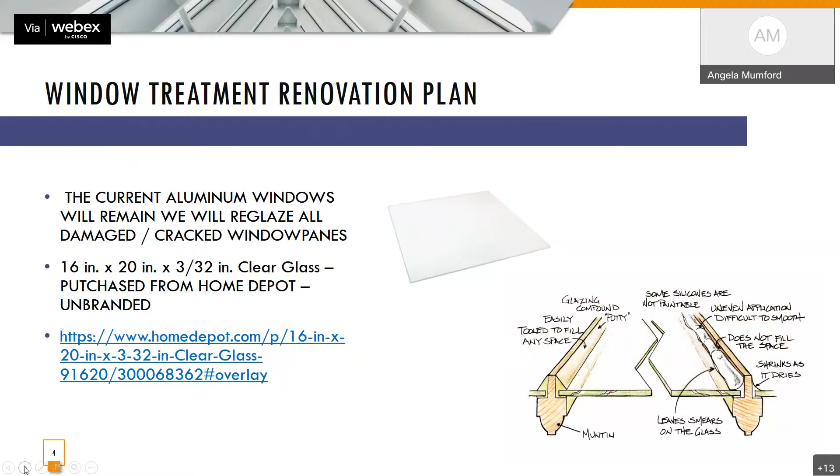And then there was also for the windows -- we had a motion and conditions, and on that motion and conditions, one of the issues was they wanted us to specify the windows that were going to be replaced. But we're not going to replace any windows. We're just going to reglaze the cracked windows that are already there, because the windows are aluminum, so we're just going to reglaze those windows that are already there. Well, windows aren't part of your variances, so you don't have to worry about us reviewing that.

Okay, let me see here. And then we have the shutters. Well, I see that wasn't a part of the variances either. But the parking was the biggest issue, and we're going to have that, and that's going to be shared. So we're going to have the parking and the lighting plan, and we're going to have about 18 spaces.

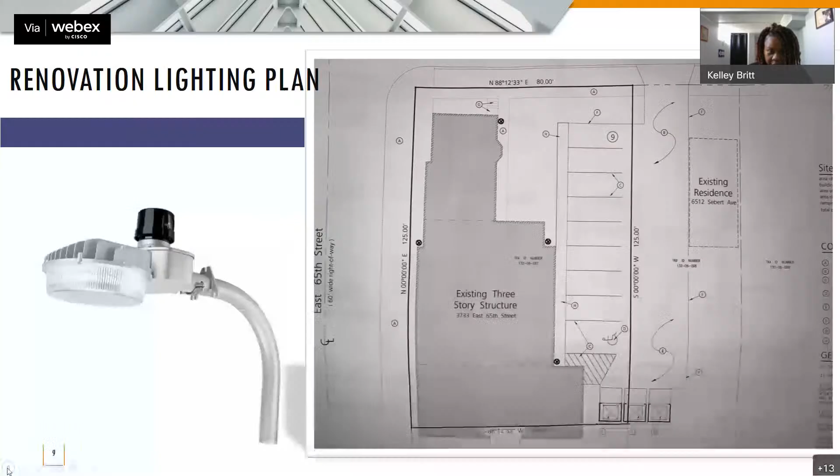So the variance as written up now is that you currently have 13, and those are the ones adjacent to the building. But you only have 9 there, and then you're proposing those extra ones that you're going to share with the other neighbor, correct? Correct.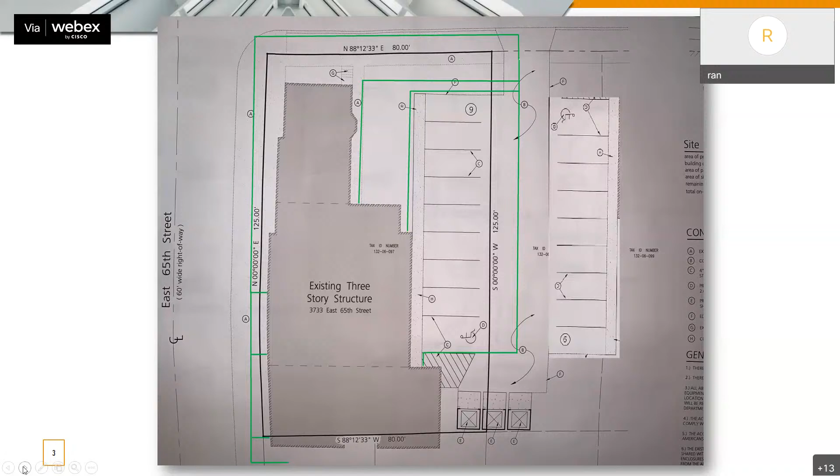Madam Chair, to perhaps Ms. Kukla or the appellant -- do we have the lease agreement for those additional parking spaces? Did we receive a copy of that? Did I hear a yes? Let me check the file. I don't remember receiving one, but I will double check. No, we can make that a condition.

And I see we had a rendering of the hedge to fulfill that requirement, correct? Screening. Mm-hmm. Yep. Okay.

Madam Chair, I do want to point out that we also have Nicole, our neighborhood planner, Nicole Calhoun, who would like to comment, and we also have Marilyn Mosinski from Slavic Village. Yeah, I just wanted to make sure Ms. Mumford was done with her presentation before I called on anyone else.

Okay, and so we do have the leasing agreement from the neighbor, but I can go ahead and send that over to you guys. I just have to find it. So we do have that. Okay, well, you can finish your presentation, and then while others are talking, you can try to send that over. Okay.

Well, yeah, no, we're done with the presentation. So we're going to have the 7 units and then additional parking, and we're going to do a storefront with the coffee shop in the neighborhood. A coffee shop with coffee and then kind of like a cafe -- espressos, wraps, and things like that.

All right, okay, we'll go with -- you said we have the CDC here. Is that Marilyn? Yes, it is. Yes, ma'am, go ahead.

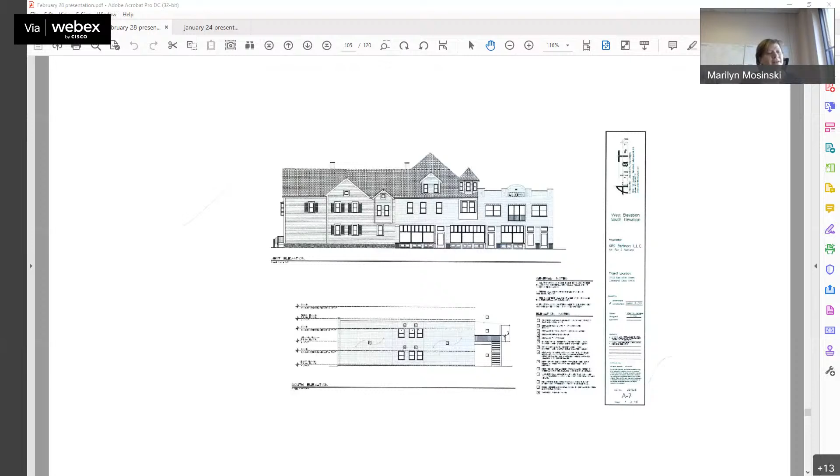Good morning, everyone. This is Marilyn Mosinski from Slavic Village Development. I'm representing myself, our CDC, and also Councilwoman Marr. I want to let you know that we have yet to really get these -- as you can see, the presentation given today is more of a design review presentation than a variance for parking. This is yet to go through; this is a design review district and has yet to receive final approval for the design that was presented to us. And in fact, we just heard from Ms.

Mumford on February 15th. Before that, the entire time when we were working with another person on this project, her name was Alexandria Kudekis.

That's when we received some of these drawings again. They had tried to go through, and Ms. Calhoun will explain the timeline on design review. But as of November 23rd, 2021, I received a voicemail message from Ms. Kudekis saying she was no longer involved in this project and that she and her partners were not helping Mr. Romano anymore. From November 2021, we did not receive anything till February 15th to even try to put it back onto design review.

I do know that in our conversation with Mr. Romano, when I asked him about maintenance issues on the parking lot—overgrown grass, garbage, broken windows—he told me he wasn't planning on doing anything to the property to take care of this. Also, he has not paid his property taxes since he purchased the building in November 21st of 2019.

With all of those conditions, we are asking that you do not approve this variance until it has gone through review. We've not had a community meeting because we just met Ms. Mumford on 2/15—she was introduced via email to us on February 15th. So the councilwoman, the CDC, and the residents in that area have not met with anybody to look this over, and we've not had a design review through that. So we are asking for a non-approval of this variance, hoping we can get this back on track and come back another time for you.

Ron, the glass is broken in the front windows of the shop, you need to cover it with plywood. I send my guys and we cover the windows. You tell me the bushes are not good, you need to clean the snow—this is what I do the last two years because this building is very important to me. It's the front of the Slavic Village, and everything she tells me—cut the bushes, cut the grass—it's okay, they don't approve it, but in the time of the process to approve it, I fix everything she tells me: clean the snow, cover the glass window, because people use drugs inside the building.

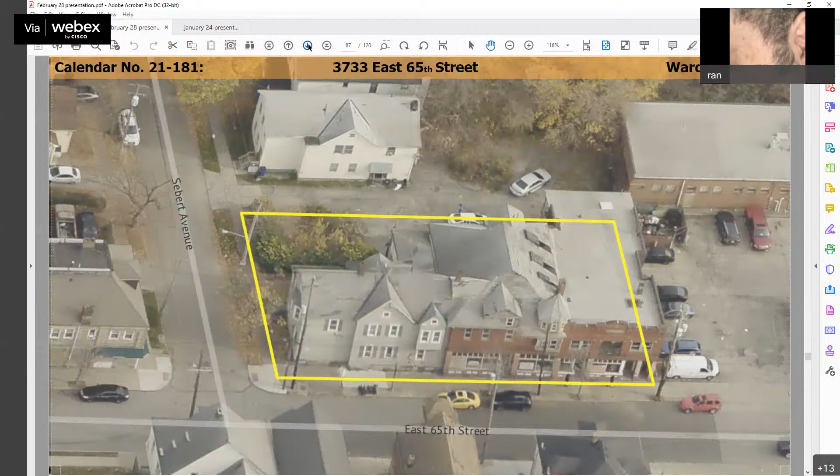And I tell her about this. After a few days, I go cut the bushing, I go buy the bushing. After this, go cut the grass, I go cut the grass. She texts me another email: clean around the building. I clean around the building. And I do everything to approve this building for me. I'm ready with the money.

I want to do everything by the code. And it's very important because this is the front of the neighborhood. So I don't want to sell it, I want to fix it and keep it. I feel it like it's something in my life. So everything they tell me to do, I do it. And I'm not laughing for anyone in the face. I respect everyone.

And I come to this building several times, to the city, because I want it to be happened. So every time she tell me the last 2 years to fix, I do it the same day or the next day - cut the grass, the bushing, the plywood, clean the snow. They not approve it, but everything she tell me, I do it because I want to feel good with this job and she feel like I do something to the building. But all the time the building, they broke the building and use the drug inside, I not feel good with this.

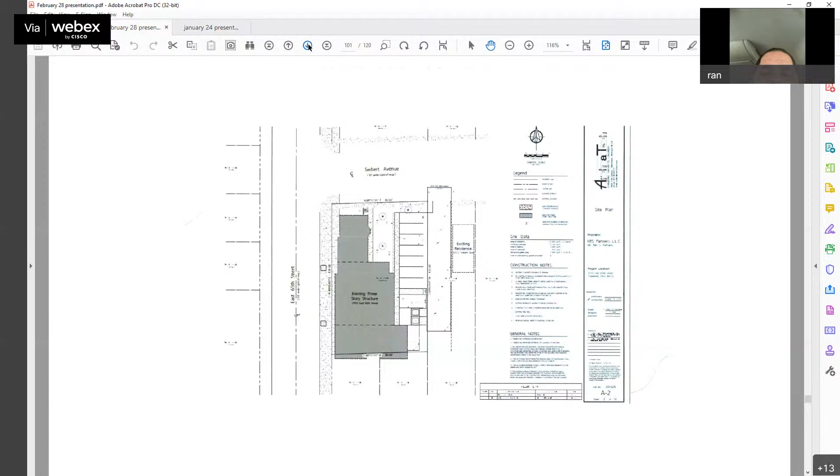Yes, Madam Chair, just for clarification, again for the new members here on the board, there are, as Ms. Calhoun stated, two separate approvals. If the board approves the variances today, they would still have to go through the design review process. One thing that over the years we often see when there is a use issue: the appellant does not want to spend the money to get these extensive drawings if they don't know whether or not they're going to get the variances. So there is often - I hear that, and I don't know if it is in this case, but we do hear that often. So sometimes it's a catch 22 in these cases. Just a thought, Madam Chair.

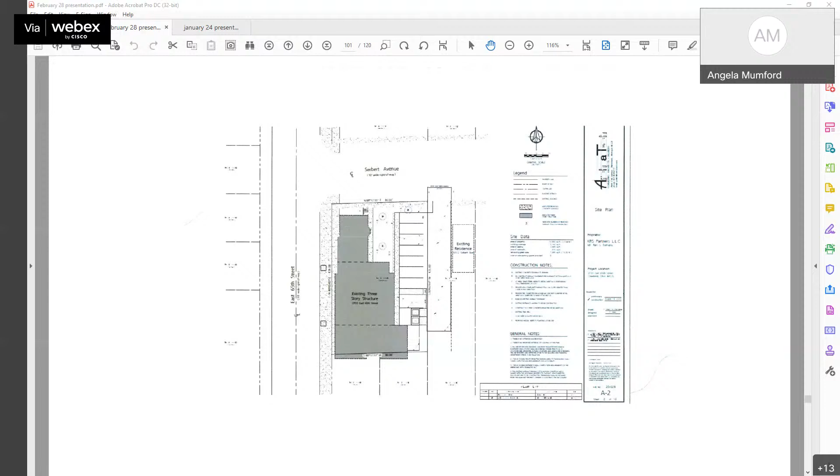Okay, Madam Chair, we need a date. What's available is March 21st and or March 28th. We could go further into April, we have April 4th and April 11th. It is up to the board, of course. Yeah, I'm just gonna ask Ms. Mumford, how much time do you think you need? March 21st is good. Okay, are you sure you'll have everything you need by then? Yes. Okay, we'll put it on March 21st. Madam Chair, just one thing.

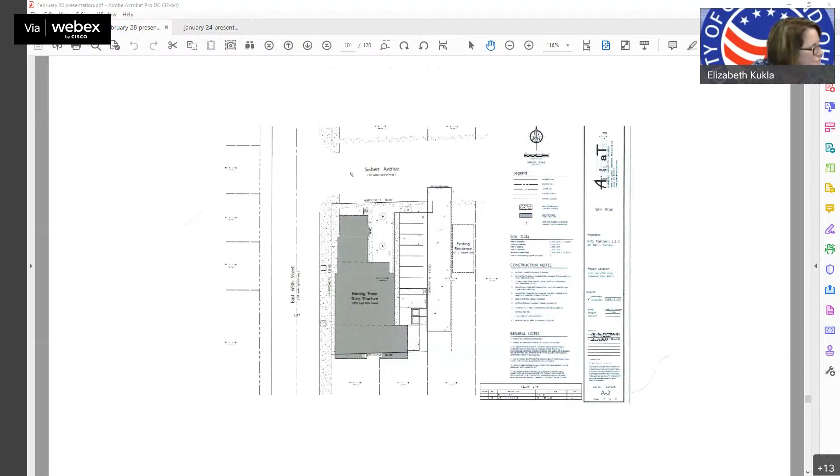We are aware that CDCs only have meetings certain times of the month. Perhaps we can hear from the CDC if they would be able to get them in before the 21st, since that's approximately 3 to 4 weeks away. My position is we would like to have a community meeting, but that's not a requirement. I just need the appellant to have everything they need for the variance review today. So if the CDC can get them in, that's great, but it's not a requirement to come back to us on March 21st.

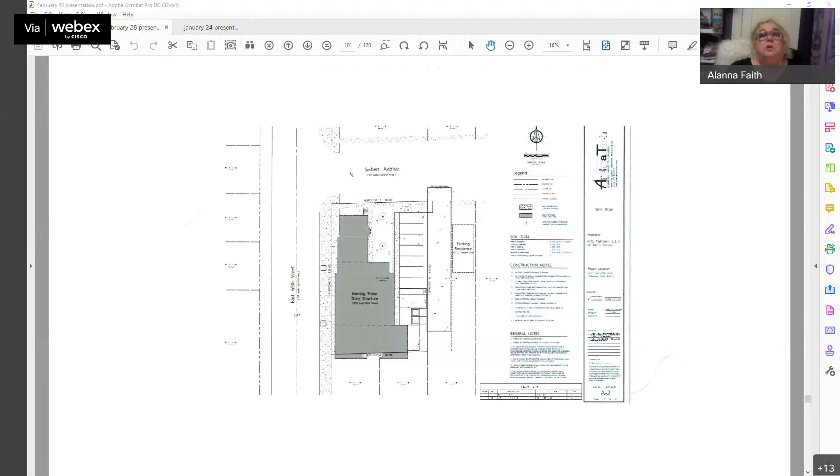Did Ms. Mumford state that she will be prepared by March 21st? Yes, correct. And if you start getting through this and realize you're not going to be ready, please let us know before March 21st, and we can postpone you again. But don't wait till the last minute if you feel like you won't have this stuff prepared.

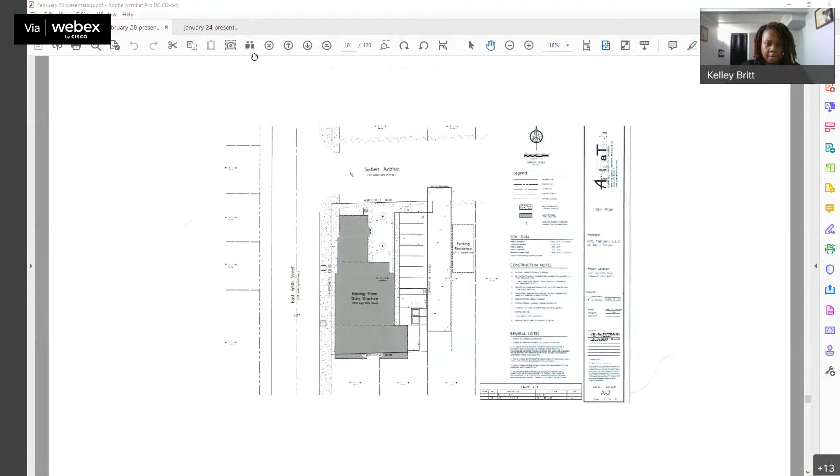Okay, Madam Chair, that concludes our cases for today. We're on to old business. What's on this list? So, Madam Chair, with your review of the resolution for 21-192, I believe everyone received it. Is everyone satisfied with it? We can go forward with that one. So it would be 1, 2, and 4.

I wasn't able to finish calendar number 22-008 before this date, so we need another week. Okay, no problem. Without objection, board? Without objection, I'm good with that. Without objection.

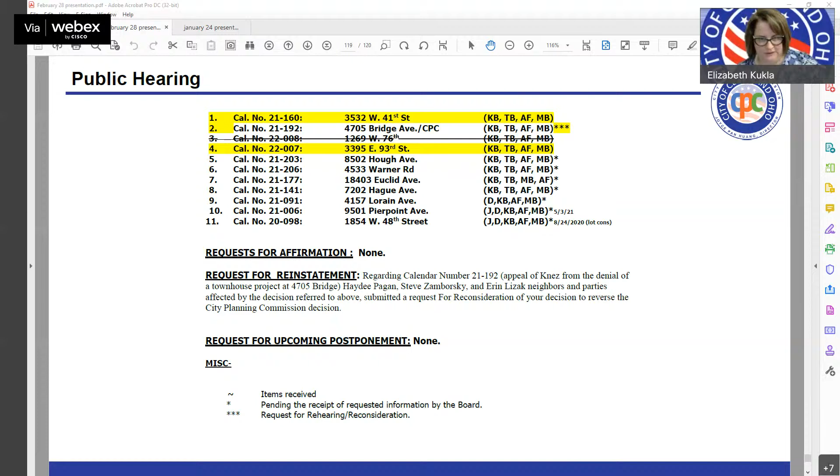All right, keep me posted, Liz. Can you send us the link to that? Maybe if we know someone. Yeah, oh sure, so right now it's in-house. Oh, so it's only in-house. Okay, yeah, I can't post it out yet, sorry about that. You could still pass the word, you could talk about it, but if I find somebody great in the city, somebody already here, that's the quickest way, that's much easier. And that's proper protocol. That's right. But if and when you can send it out to us, do so, and we'll take it from there.